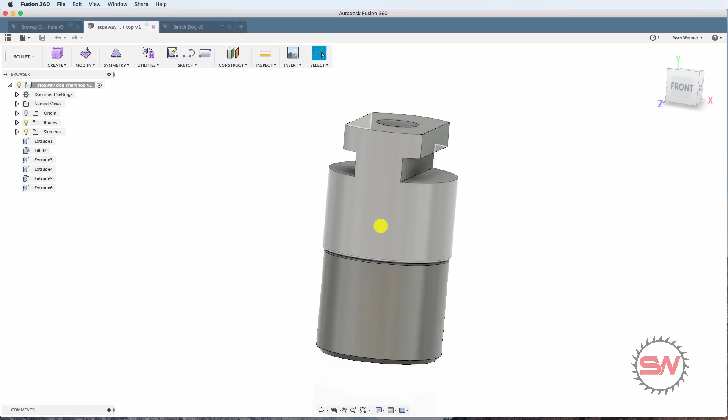What they are is a standard 20mm bench dog designed to fit the holes on your MFT table, and then they have a slightly larger surface for referencing and squaring up your material with the table. Right here we've added a small flange designed to fit into the T-slots on the side of the table.

This will give you an option for stowing your dogs when you're not using them. One of the problems I've found is that when I'm using my MFT table and I have some bench dogs or clamp dogs in there, when I'm done using those and want to clear the table off to do other work, I'll often pick them up, put them in my pocket, and sometimes forget they're there. They make their way home with me, and then the next day at the shop I'm looking for my bench dogs again.

So we're hoping this T feature here might make it a little bit easier to store the dogs on the side of the table, and just make it a little more convenient so you're not hunting for your dogs the next day.

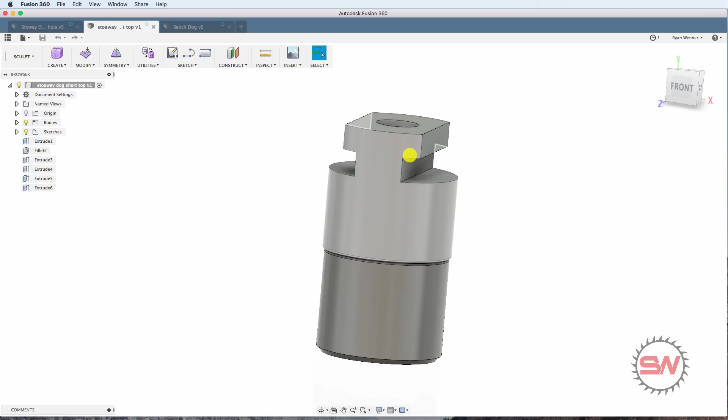This version here, we've added a threaded hole to give you some options for clamping and some other possibilities it can be used for. Then the T-slot to mount it to the side of the table, and the rest is a pretty basic 20mm dog design.

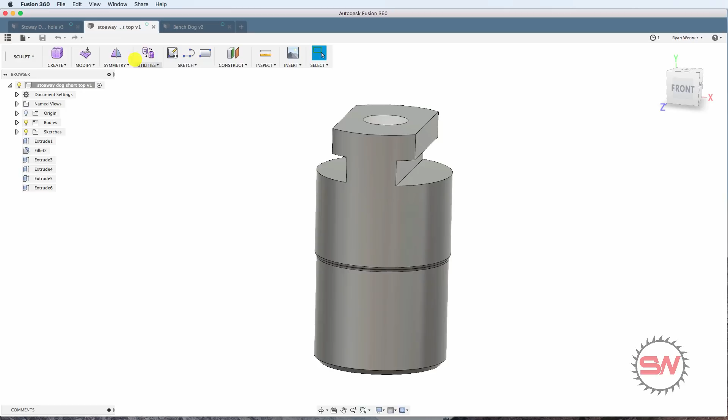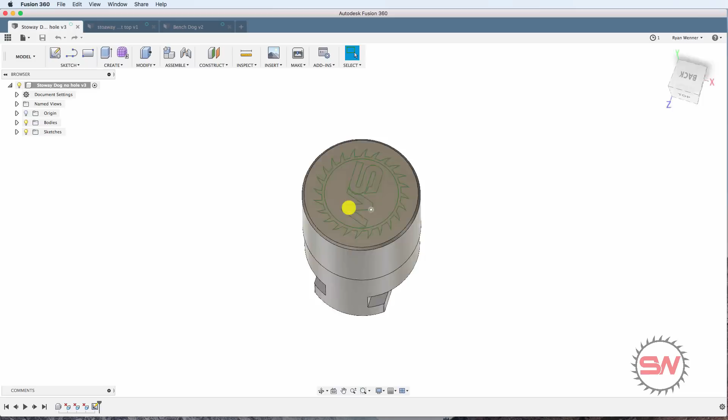We made another variation that's a little more showy over here. It's a little bit of a shorter profile. The part that sticks up above the table is the same height, but the overall height is slightly shorter, again with the T-flange here that'll let you store it in the side of the MFT table. And on top we've engraved our Seneca Woodworking logo just to give it a little more flair and be a little bit different from what's out there.

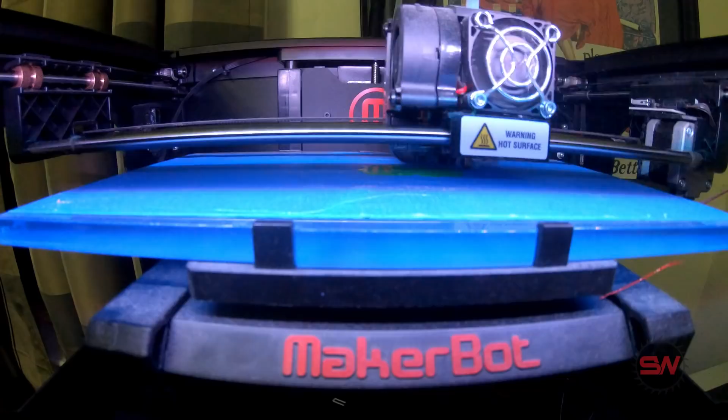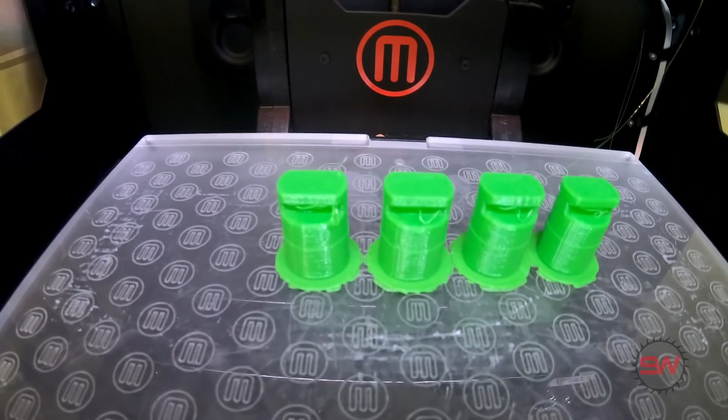Now that we have the product designed in our CAD software, we're going to take those digital files, send them over to our 3D printer, and get some actual physical parts that we can play with. We're going to take those parts over to our MFT table and test fit them to see if the design works like we think it will. If that goes okay, we're going to take them over to our CNC machine and machine a final version so we can actually have a real product to test and then eventually make and sell.